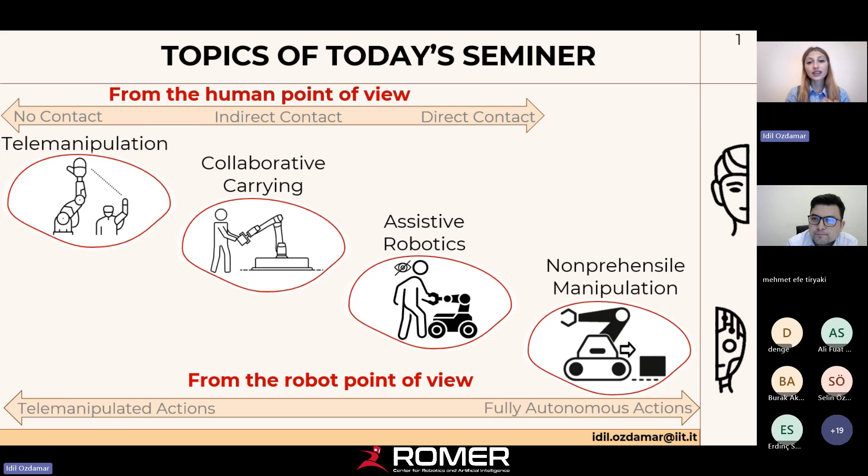In my research, I had the opportunity to work with various kinds of robots to establish effective, safe, and contact-rich interaction, not only between humans and robots, but also between robots and their environments. From the human point of view, these interactions can range from no physical contact to direct contact. From the robot point of view, they involve different levels of autonomy, extending from telemanipulated actions to fully autonomous ones. Therefore, I divided my talk into 4 main categories: telemanipulation, collaborative carrying, assistive robotics, and non-prehensile manipulation.

So let's start with our first subcategory, telemanipulation. The essence of telemanipulation is captivating, owing to integrating human cognitive skills into the system, especially in unknown, hazardous, or dynamic environments. Nowadays, the technological advancements in collaborative robot technology and motion capture systems reduce the classical limitations of effective teleoperation and renew the interest.

Recently, bimanual manipulation has become very popular. Here, the dual-arm manipulators are coordinated to achieve a mutual goal. But with the increase of task complexity, the simultaneous use and coordination of multiple robotic arms is necessary. To this end, a shared control concept has been introduced. It empowers the robot to operate with a degree of autonomy, hence reduces the user cognitive load.

However, very few studies focus on employing more than 2 robots. For instance, a multi-robot data collection platform was developed for gathering demonstrations to coordinate the arms, but only validated in simulation. Another work aimed to increase robots' manipulability index, while the object was assumed to be already grasped. In realistic applications, it is better to cover situations like approaching, grasping, and releasing.

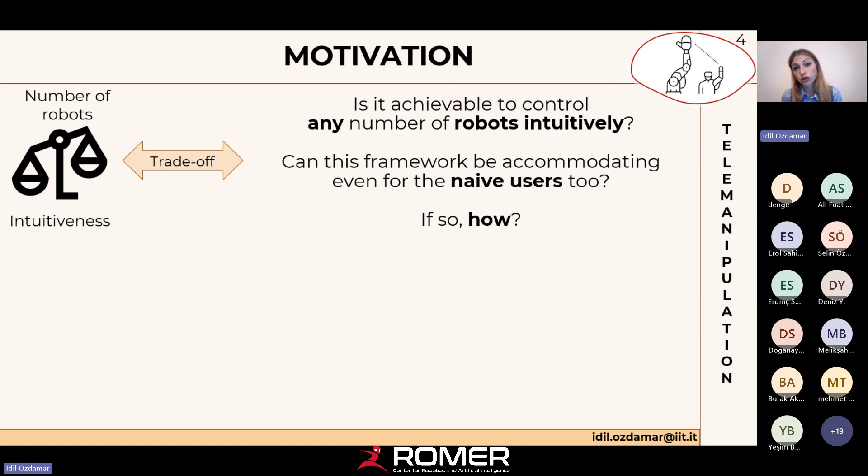To sum up, the questions we seek to answer are: is it achievable to control any number of robots intuitively? Can it be accommodating even for naive users too? And if so, how? In response to that, we propose a novel telemanipulation framework that enables both the individual and combined control of any number of robotic arms.

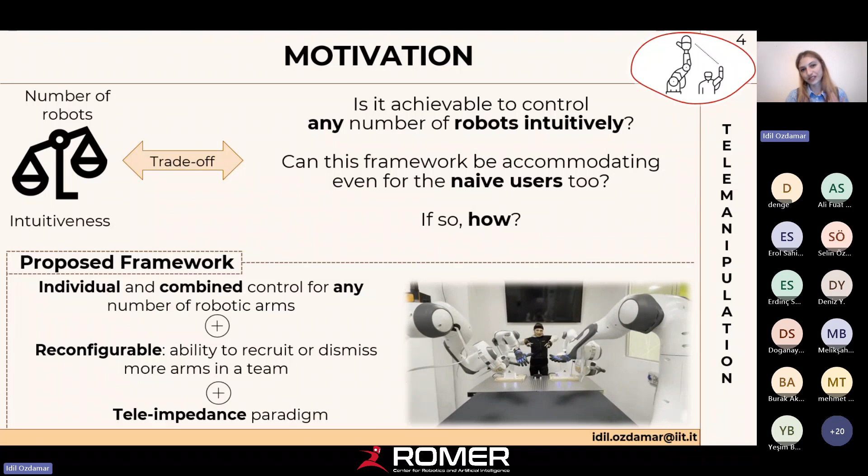In the different phases of our reconfigurable system, each robot could act as an independent arm or one of a pair of cooperating arms. Moreover, the teleimpedance paradigm integrated into the framework addresses performing complex tasks with better safety, adaptability, and efficiency. The framework has three control modalities, and it enables users to control subgroups of arms with the selected control modality according to the task.

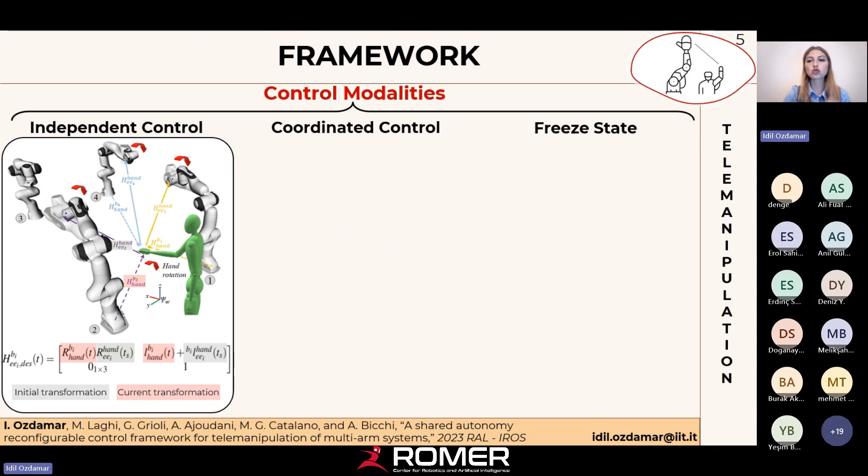The goal of the independent control strategy here is to mimic human hand motion with the selected robot. When the control starts, the initial relative transformations between hand and robot end effectors are collected to map the hand pose and the robot, given in the gray boxes here in the equations. After that, the continuous hand rotation and translation, highlighted in red here, are used to obtain robot desired poses. This video shows how a robot group moves with the independent control strategy.

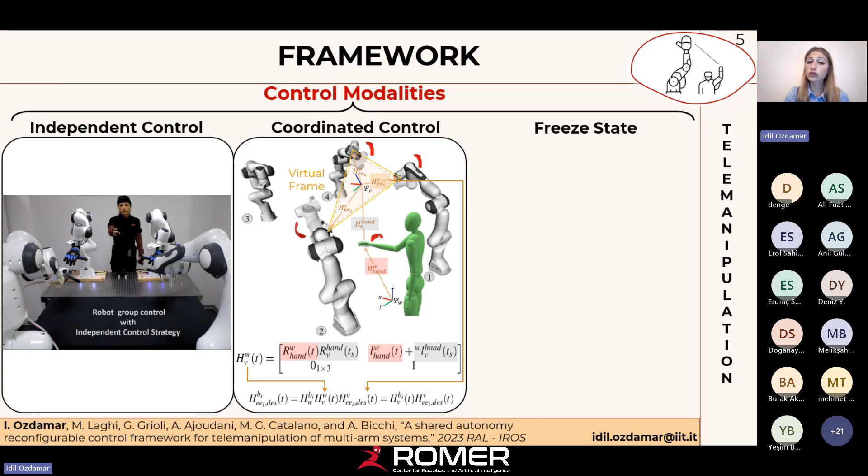When the coordinated control is initialized, the robots are linked to a virtual frame created at the midpoint of the robots. And the hand is also linked to this virtual frame by using the initial transformation again. The motion of the virtual frame is controlled by the human continuously. Moreover, the user can regulate the distance between the robots with the joystick. Here in the video, you can see how a robot group moves if this strategy is selected.

For both control strategies, robot stiffness is regulated by mimicking the stiffness profile of the user's arm muscles. I will explain how we did it.

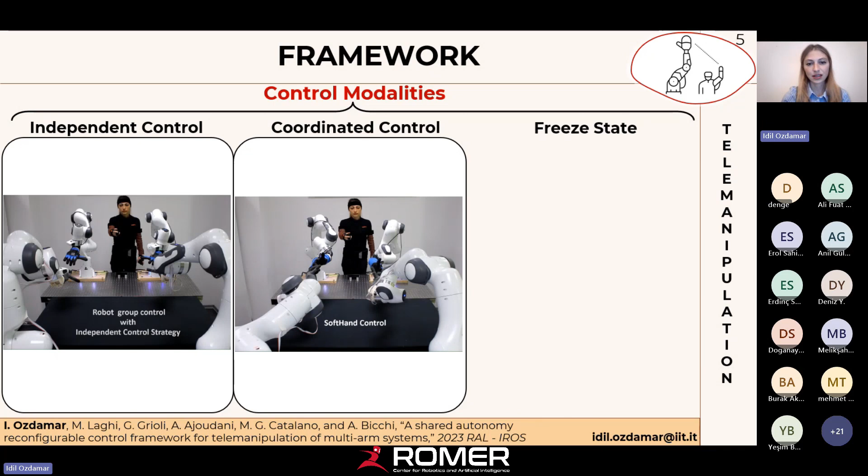When dealing with multiple manipulators, one can benefit from keeping the robot at a definite position. If the user enters freeze state, the robot's poses and stiffness remain constant. The robot group and the last used control strategy are preserved. With this, when the system is unfrozen, the user can continue from where they left off. Here you can see the user enters a freeze state.

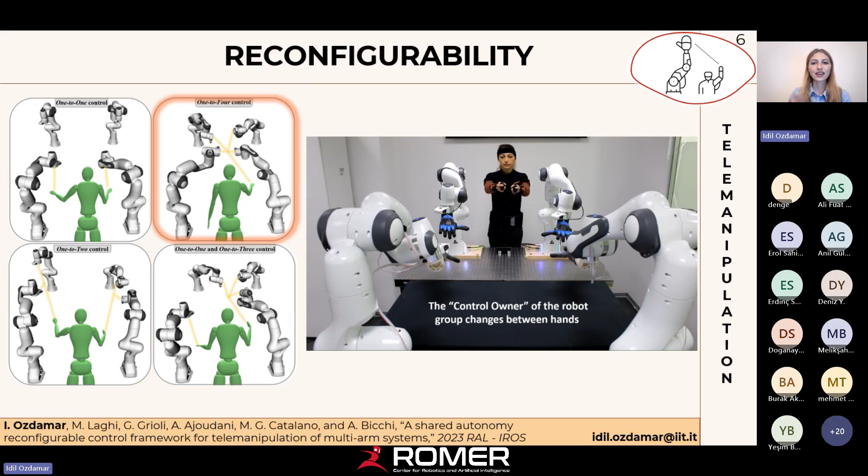I would like to elaborate more on the reconfigurability of our system. This video shows how a robot group with 4 arms can be controlled. Moreover, the operator can intuitively switch the hand that is responsible for the motion of the group. Here, the right hand controls the robot group of 2 robots, while the left hand controls the other simultaneously.

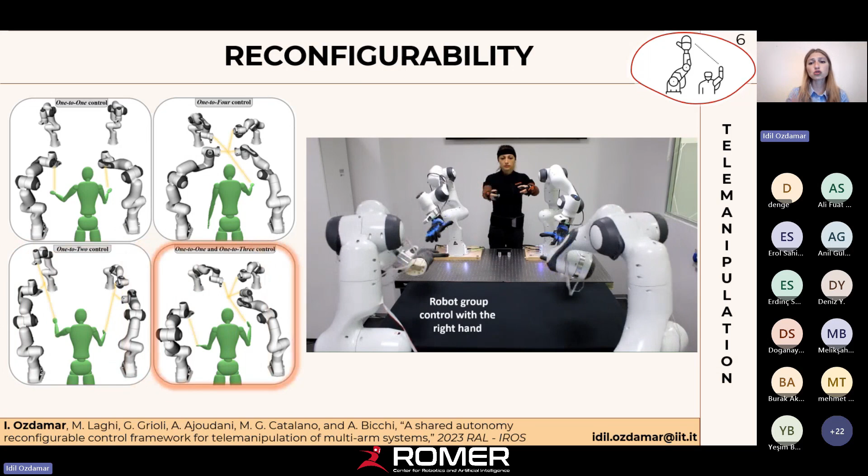On top of this, the robots can be seamlessly combined to form a single robot group. In the last scenario, the user controls a robot group with 3 robots using 1 arm, and 1 robot, then combines again and enters a freeze state.

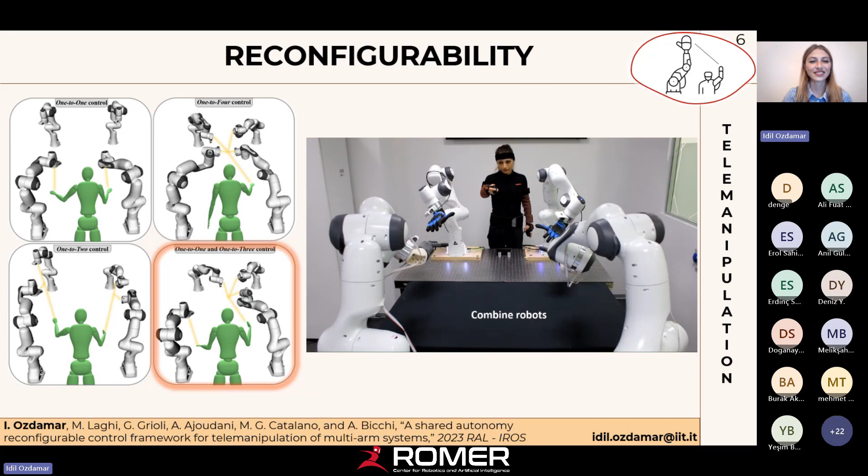Here you can see the experimental setup we used for the evaluation of our proposed framework. The Myo armbands, placed at the forearm of the user, are used to regulate the robot's impedance profile, like mimicking our muscle stiffness. Also, a graphical user interface was provided to the user in order to monitor their current selections.

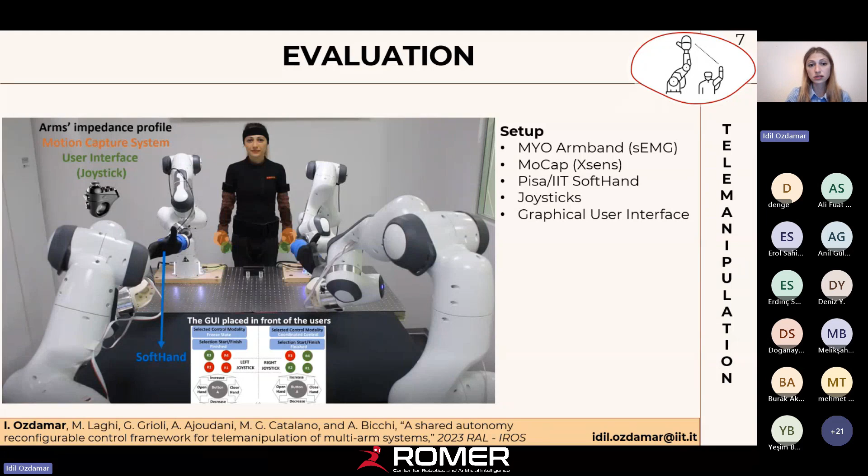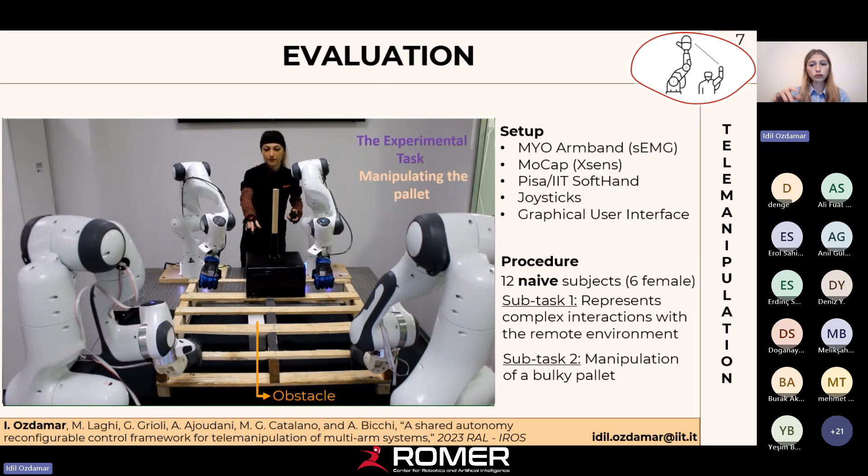The experiments were conducted with 12 naive volunteers who had not teleoperated the collaborative robot arm before. The first subtask includes placing a box and performing a peg-in-hole task, representing complex interaction with the environment. In the second subtask, the pallet must be held from suitable locations, then lifted and translated, and put back while avoiding the obstacle.

Let's look at the outcomes from this work. During the experiments, participants chose independent control over coordinated control in more dexterous parts, employing a specific robot that can reach the box and the peg on the other side. Consequently, this led us to have a wider workspace area.

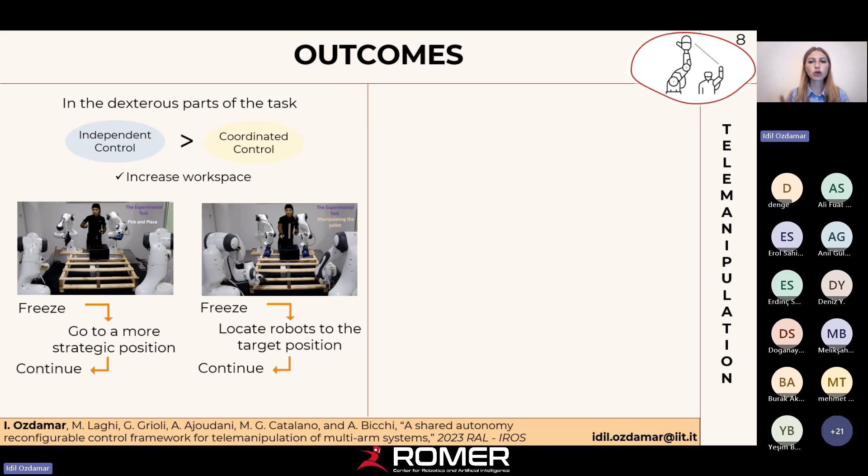We observed that the general tendency was to enter freeze state, position the hand in a more advantageous position, and then continue to do the task. Then robots are brought to the desired points of the bulky pallet and grasp it. For the manipulation of the bulky pallet, mainly a coordinated control strategy was selected. Here users can focus on the motion of the object, the pallet, instead of individual positions of the robot.

Lastly, the participants filled out a system usability scale questionnaire. This questionnaire is commonly used to evaluate performance of the system in terms of effectiveness, efficiency, and overall ease of use. The average percentage ranking that we got was 81.

It allows us to label our framework between good and excellent in this scale. This label by definition implies that the system is well integrated, not complex, and a short familiarization period is enough to adapt from the user side. This is also supported by the decrease in the completion time of the users in the second repetition.

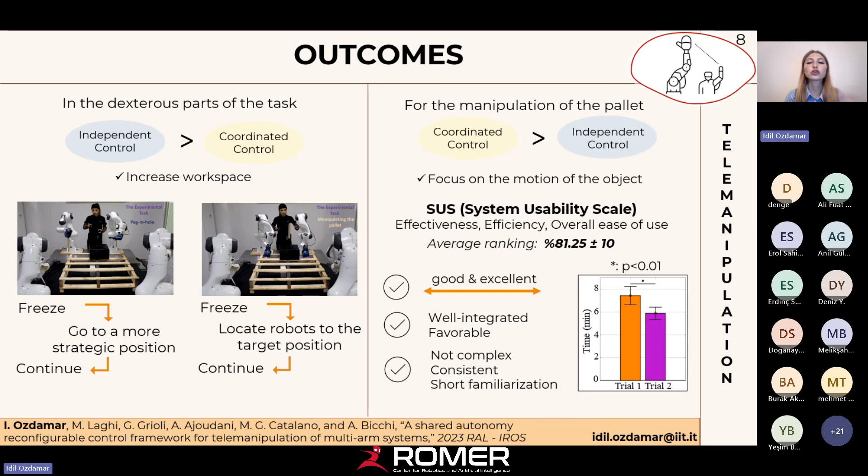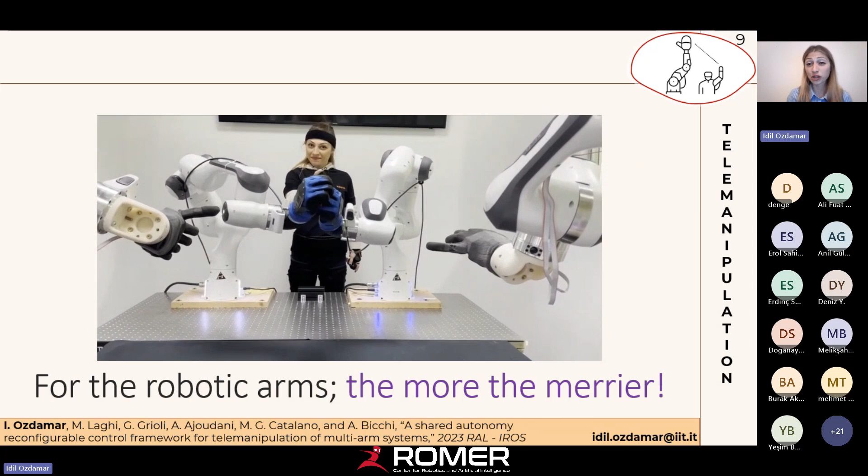I want to summarize the overall framework again. We have developed a novel multi-arm manipulation framework that provides intuitive control of both individual and various combinations of any number of robotic arms.

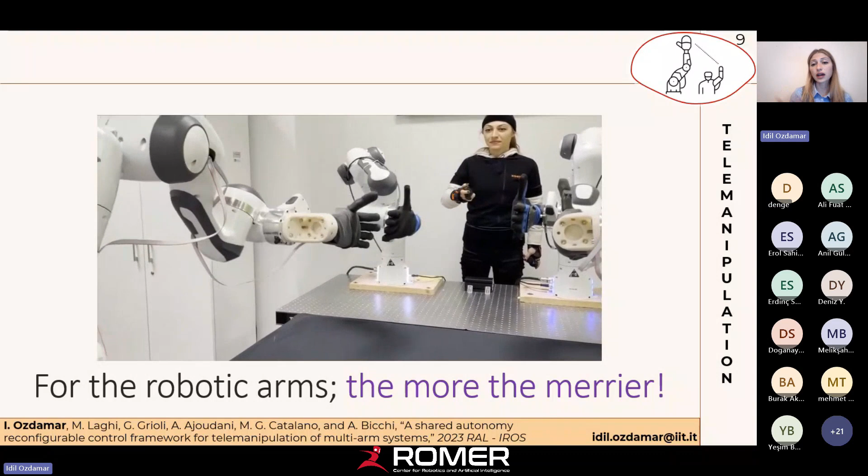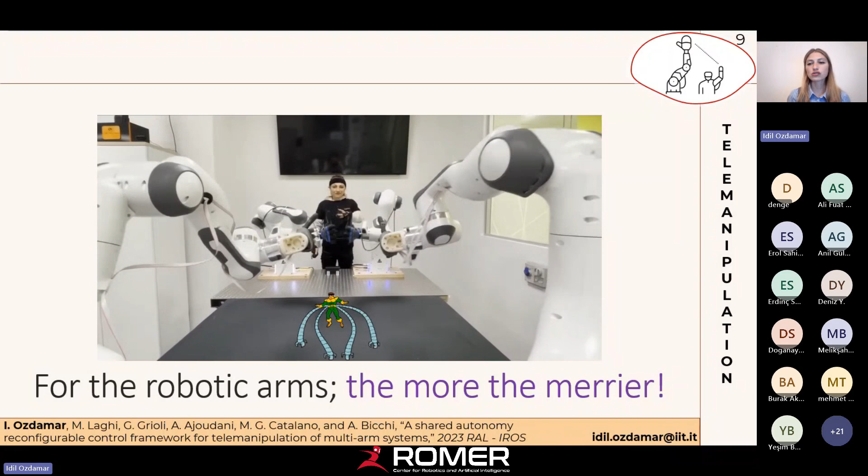Moreover, we demonstrated the advantage of having different control modalities in multi-robot control. Besides, the employed teleimpedance paradigm, which was a constructive complement of our system, may ease complex interaction with the remote environment.

Now, another research area that attracts a lot of attention is collaborative carrying. It centers on the dynamic synchronization of human-robot dyads and offers promising solutions for minimizing user discomfort, especially in industrial environments.

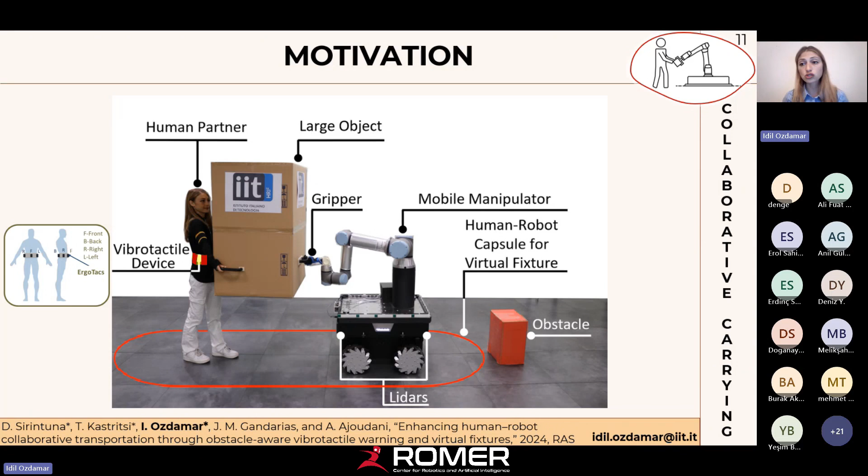Building on this motivation, one major challenge in collaborative carrying arises when a large object obstructs the operator's view of the surroundings. During transportation, such occlusions can weaken the human leader's decision-making capability, which consequently increases the risk of collision.

To address this issue, our study proposed a situational awareness framework for collaborative transportation tasks. It is composed of three main components: the end effector dynamics, the obstacle feedback module, and the whole body controller.

The end effector dynamics calculates a reference velocity, following a standard admittance control law based on the force transmitted through the object in between. The obstacle feedback module aims to augment the human partner's sensations and yields awareness of the obstacles around.

This augmentation is realized through the proposed vibrotactile warning and virtual fixture unit. The vibrotactile warning unit starts to generate warning vibrations via ErgoTacs, placed on the belt of the human, to convey information about the location and proximity of obstacles before the human-robot dyad gets dangerously close to any of the obstacles around.

On the other hand, the virtual fixture unit restricts the team's movement in the direction of the potential collision, only that direction. Particularly, it activates only when the distance to the obstacle is critically close, like we are really close to hitting them. Lastly, the whole body controller generates the required joint velocities of the robotic platform using the desired velocity obtained from the obstacle feedback module.

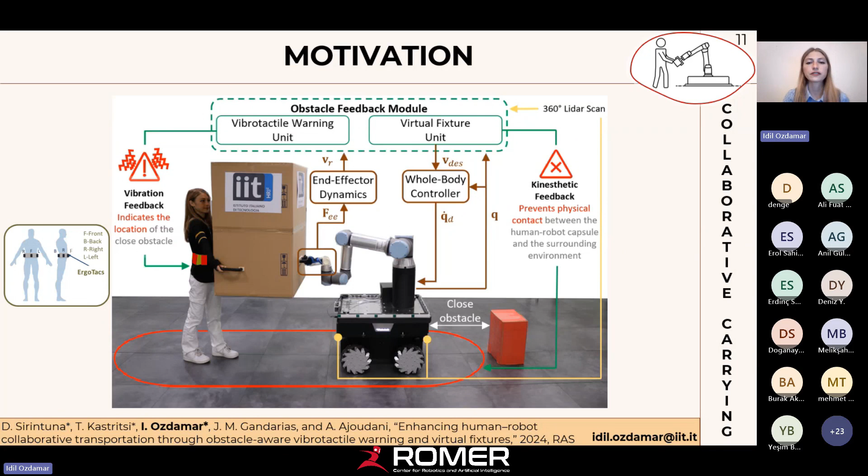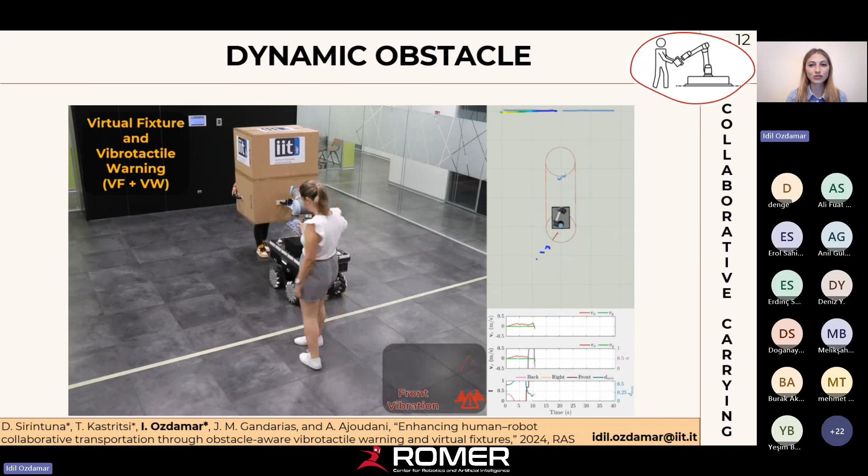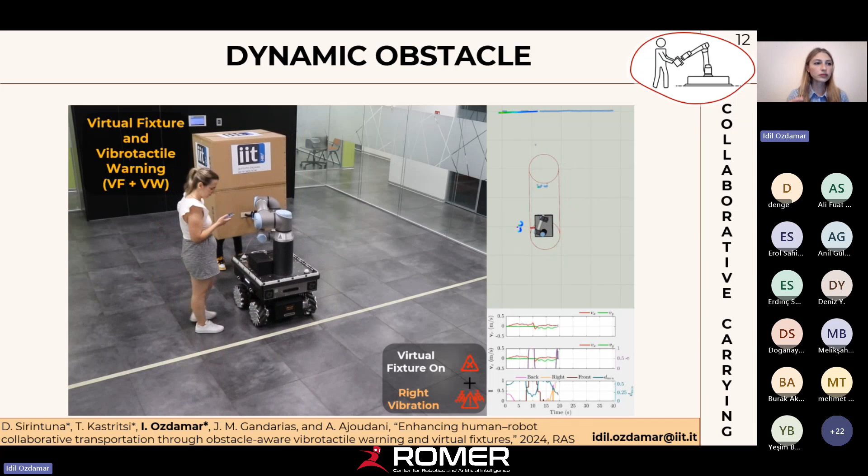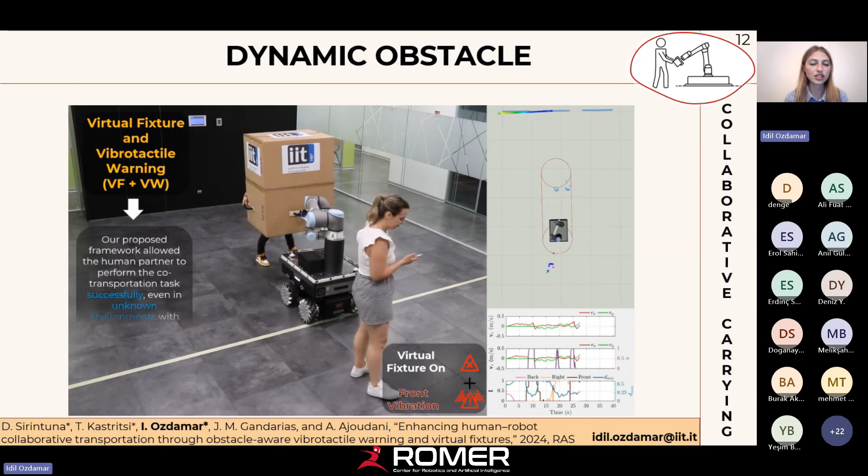Before sharing the controlled experiments that we did, I wanted to first give a short demonstration that captures the overall idea, with the dynamic obstacle case being one of the most challenging scenarios. As you can see, when she entered the workspace, the robot immediately perceived the change and started to create a vibration. Here the vibration is activated, and the virtual fixture also restricts movement in that direction, not allowing it to hit anything around.

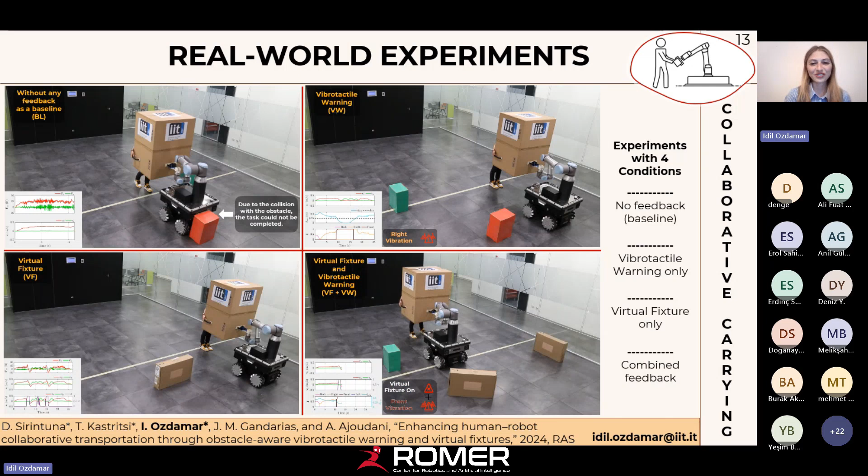After that, this time we only utilize the virtual fixture, which gives the user a sense of resistance, like kinesthetic feedback. Once this virtual fixture is on, the user should go another direction and try again and again. Lastly, we combine both feedback types - there's an early warning with the vibrations, but if you want to keep going to that dangerous place, the virtual fixture just restricts the motion.

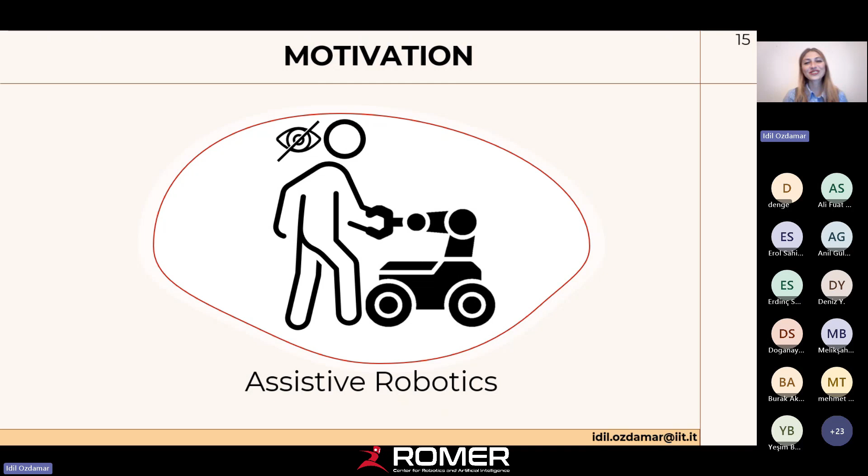Worldwide, there are more than 300 million people that suffer some kind of blindness or visual impairment. The use of guide dogs and white canes is widespread, but they come with important limitations. For instance, guide dogs need constant care, are expensive to train, and cannot make complex decisions beyond their training. This is one of the rare cases where using a robot would be literally cheaper, on top of other advantages, because training a guide dog is also money consuming, and the number of guide dogs is limited, so people wait years sometimes to get one.

White canes, on the other hand, are really primitive. It's just a stick, and they are limited to the detection range, which they can only touch with it. The development of assistive robotic systems to guide visually impaired people has big potential to overcome these limitations.

Let's look at what has been done so far in this field. Different versions of assistance have been proposed. For instance, white canes are enriched by sensors and user feedback. Also, physical assistance for keeping the user in balance is provided by robotic canes. Legged robots are employed using a leash to guide blind people, or alternatively, drones are physically connected by a cable with the blind users.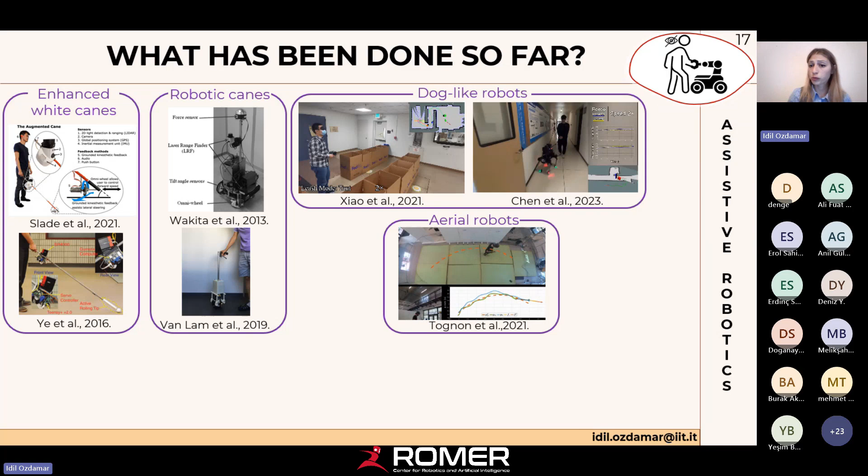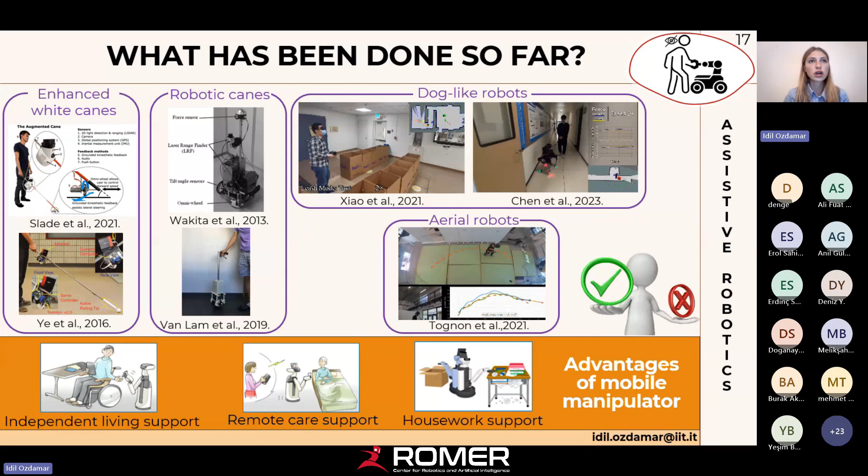However, the presented approaches share a considerable limitation: they are really task-oriented and cannot be exploited for other purposes in their idle times. On the other hand, a mobile manipulator can also be easily employed in other daily living activities. It can lead to increased independence. They can be used as a support for remote care, or it can also function autonomously to carry out other kinds of housework activities.

To benefit from those advantages, we propose a novel framework that enables a mobile manipulator to plan and execute collision-free trajectories, exploiting local manipulation skills to guide a visually impaired person through unknown environments.

In this video, you can see that a robot localizes itself within a global map and continuously updates a collision-free trajectory, given in green color, and guides a visually impaired person through narrow corridors.

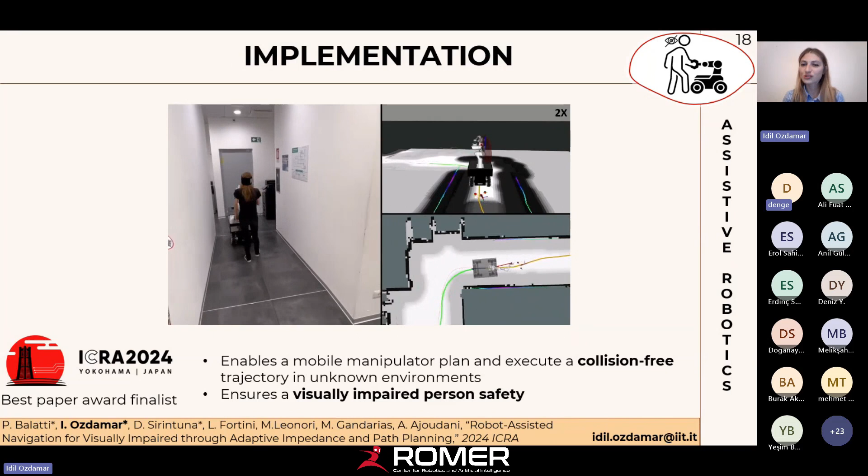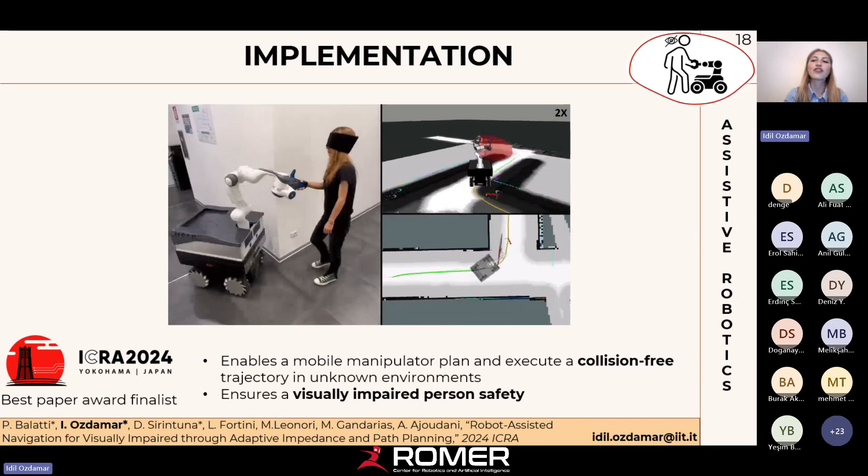Given the multiple safety concerns involved, it was crucial to design a robust and reliable framework. The human is in direct physical contact this time with the robot, and on top of that, we obscured one of the most essential human senses, the ability to see. Also, I would like to mention that this work was a Best Paper Award finalist at ICRA 2024 in Japan.

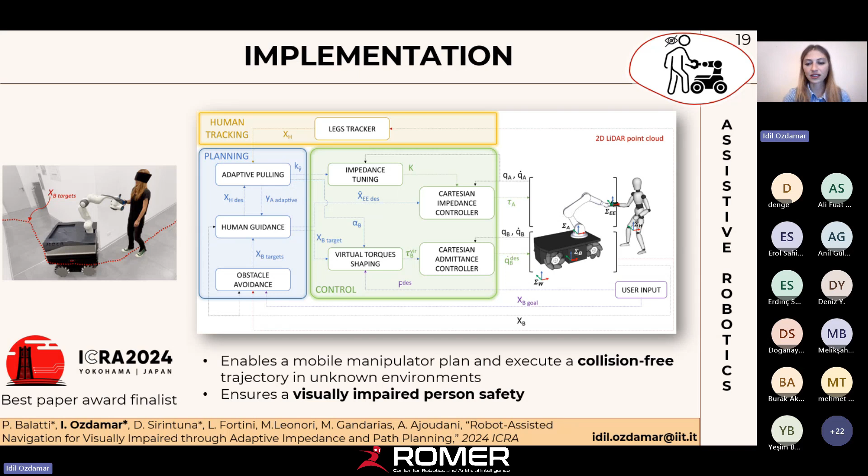On the right side, we can see the software architecture behind the framework, divided into three main categories: planning in blue, control in green, and human tracking in orange. I will go into the details of each one in upcoming slides. This is the high level side.

To generate a collision-free path, we employed an obstacle avoidance navigation stack using both global and local planners. The goal of the adaptive pulling unit within the planning is to prioritize the safety of the human. It keeps the human within the robot's collision-free trajectory.

This module generates a pulling vector between the desired human pose and the current one. You can see it in the right picture with the red P vector. We are tracking the human legs. This is the current human position, and the desired one is the collision-free trajectory.

The x component of this pulling vector is employed to calculate the gain alpha b, that is responsible for regulating the speed of the base. As a result, if the human lags behind, the robot correspondingly reduces its velocity to maintain a comfortable walking pace.

The y component of this vector is used for the lateral readjustment of the end effector pose. With this, we were able to keep the human within the safe collision-free region. Also, the y component of this vector is used for the computation of the lateral stiffness. We formulated the stiffness profile with a logistic function to ensure a lighter pull if the human deviation is low, but a stronger pull if the deviations are increased.

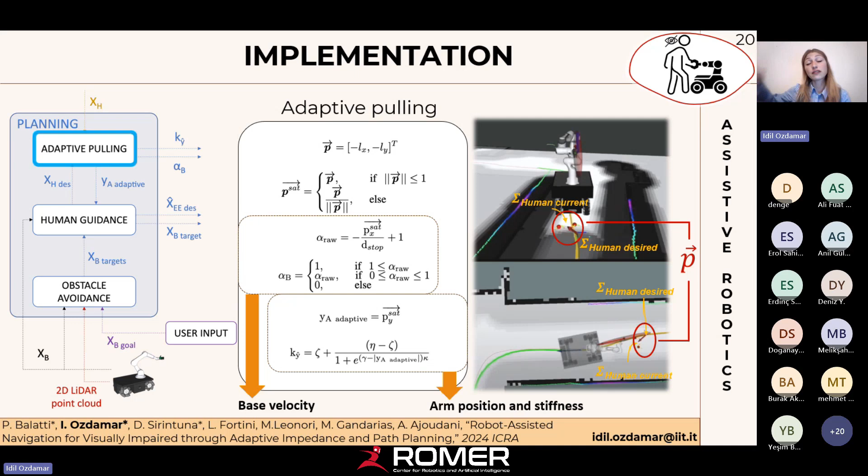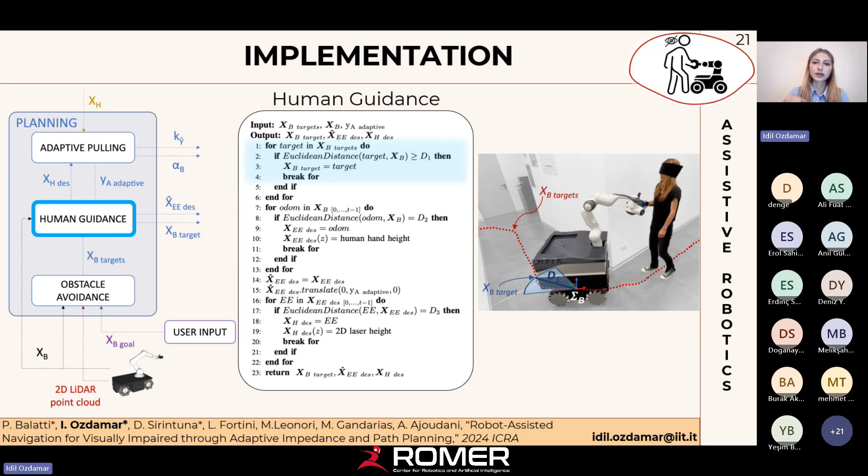The aim of the human guidance unit is to plan a trajectory that avoids collisions at the same time for the mobile base, the robotic arm, and the user coupled with the system. To do so, 3 desired poses need to be computed. The mobile base target waypoint is selected among the collision-free poses produced by the obstacle avoidance unit. So the next base target pose is one of the waypoints D1 distance away.

Likewise, the end effector desired pose is selected among the set of previously passed base poses. So since there is no collision there, it's free to choose, and we pick the one which is D2 distance away from the base. In a similar manner, the human desired pose is chosen as the previously desired end effector pose that lies at D3 distance away. And with this logic, we ensure all desired poses in the system lie within the collision-free area.

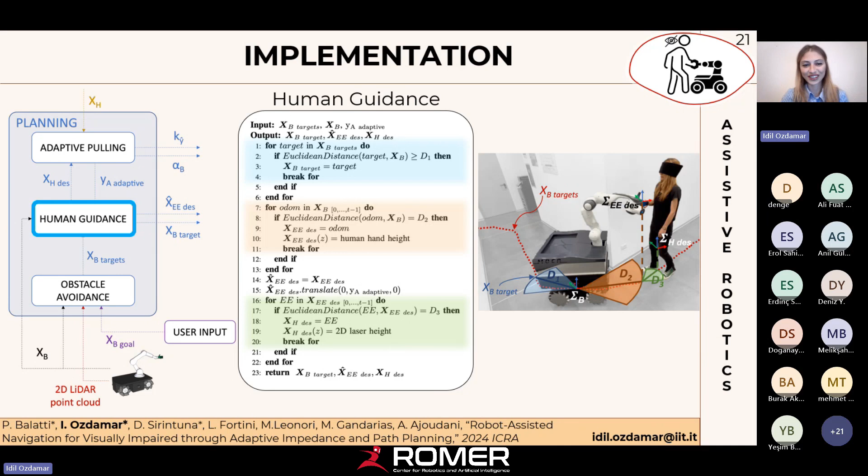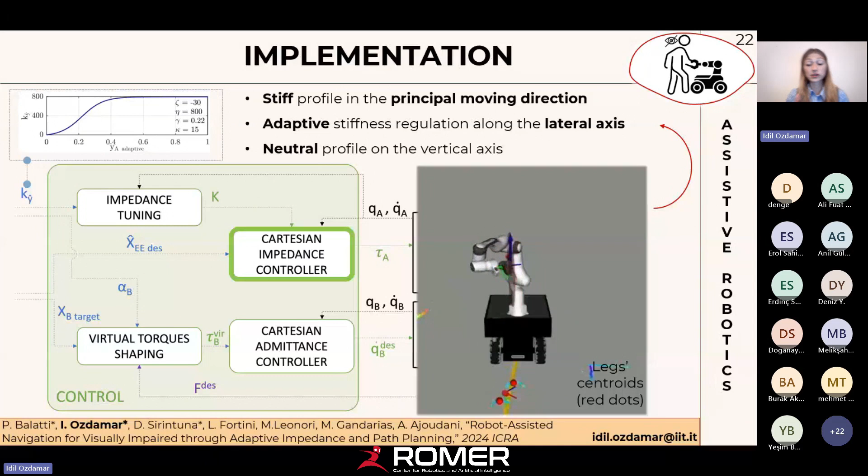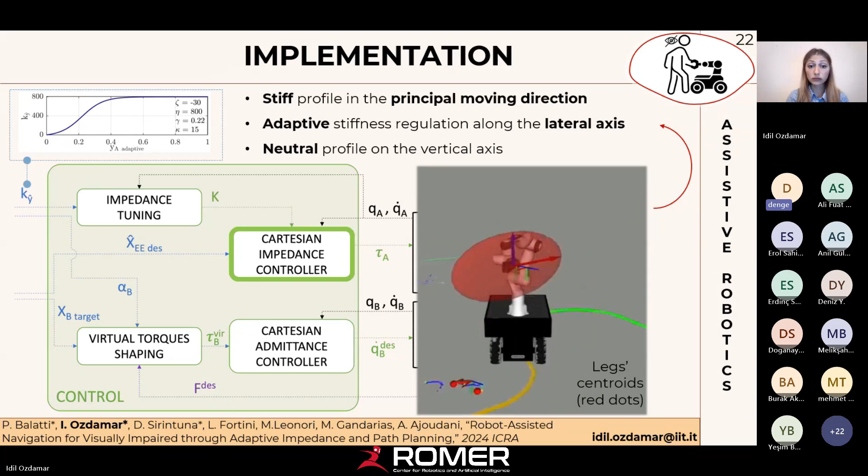With axis-independent stiffness regulation, we have achieved multiple goals at the same time. First, we kept a stiff profile in the moving direction, the principal axis of the movement. It guaranteed a strong pull toward the final location. Second, we gave motion freedom along the lateral axis when the human pose is close to the desired one. Simultaneously, we made the robot stiffer when it is required to redirect the human on the right track. You can see the adaptive stiffness profile on top. As the human deviates more, the stiffness increases.

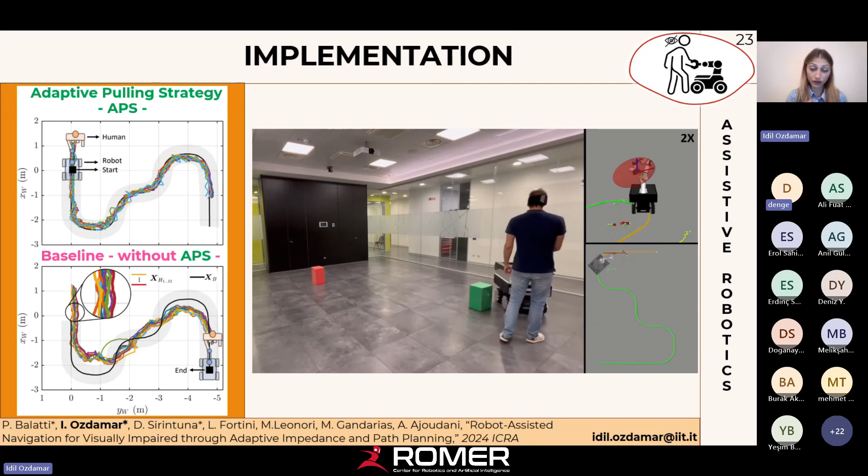So let's start the experiments that we conducted. We first carried out experiments following a predefined trajectory. In this video, we can see the user collides with the obstacles first. When the adaptive pulling strategy is on, there is no collision. In the plots, we can see the trajectories of 12 subjects represented with colored lines, with the adaptive pulling strategy in the top figure and the baseline at the bottom. The black line represents the base pose of the mobile robot.

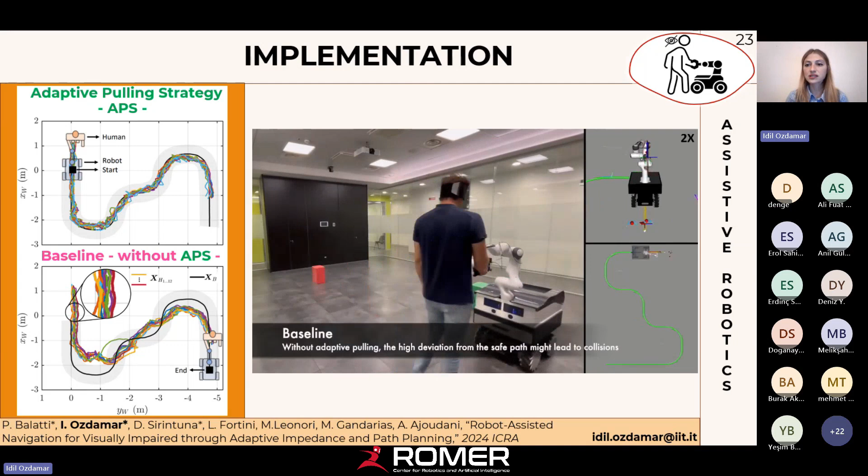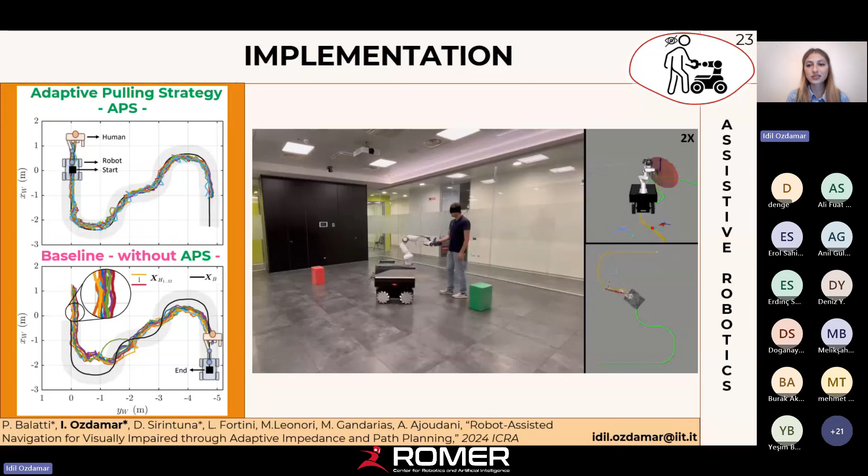By employing the adaptive pulling method, the human pose never extends beyond the robot's base footprint, indicated with the gray area. The lateral unintended deviations are compensated by the framework and all components of the human-robot collaborative system. On the other hand, in the baseline plot, the human pose goes beyond it about 25% of the time, leading to high potential collision risks. And we are never shy to test our framework in more challenging scenarios. Here is one of them.

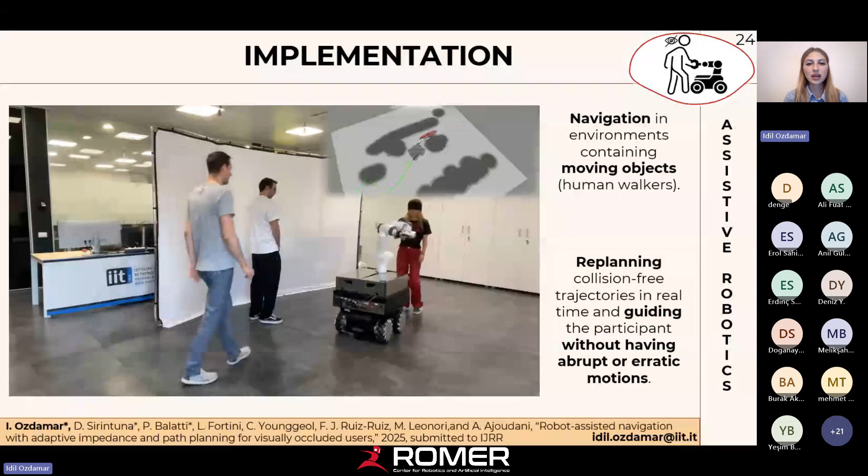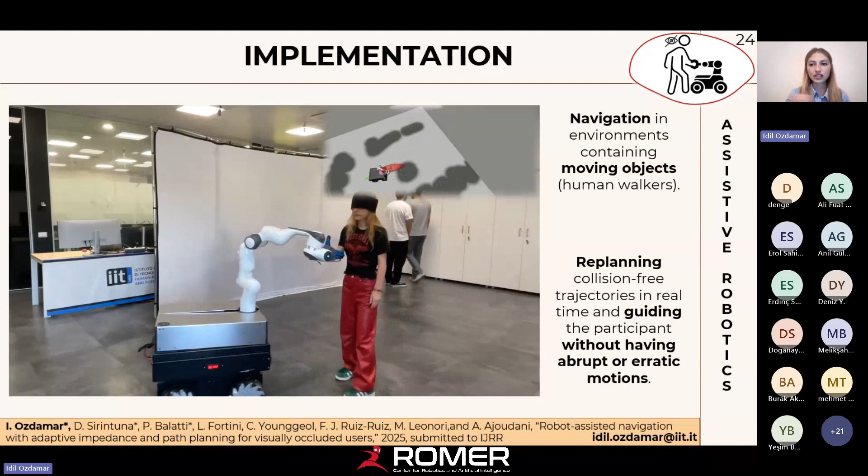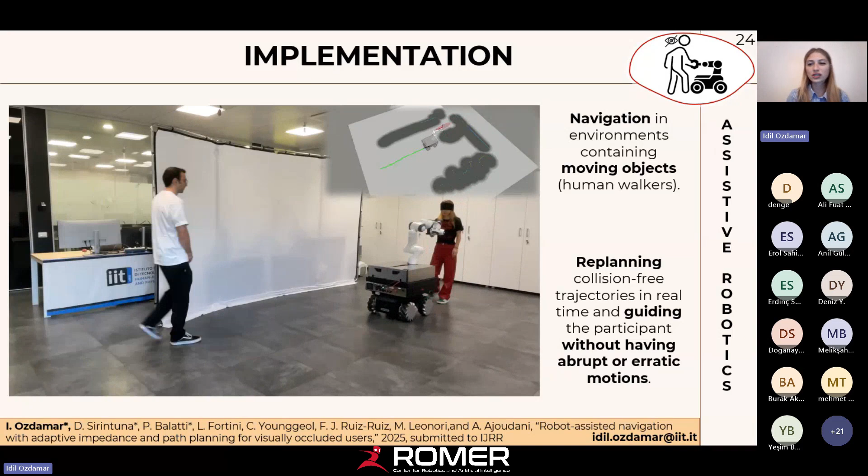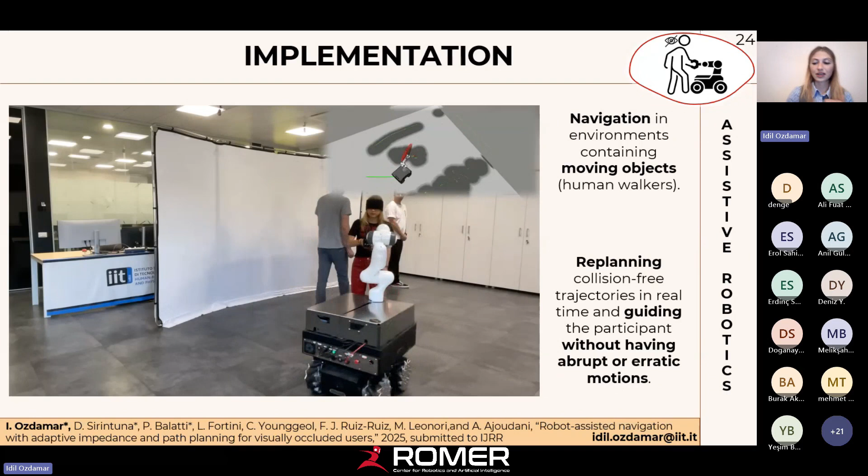It's an example of navigation in environments containing moving objects like human walkers, and you can see the replanning of collision-free trajectories in real time as the green line on top of the video here. And we were able to guide the blindfolded participant without abrupt or erratic motions, because it's important to test whether we can adapt to this newly planned trajectory both with the base and with the pulling unit at the end effector.

We placed a 3D LiDAR sensor mounted on the back of the robot to detect obstacles on top of the base. The human head is tracked in real time to estimate future collision risks based on the closest obstacle above. And if an obstacle lower than the human standing height is detected, a vertical path is planned first. Then the end effector height is continuously adjusted based on the detected head position and the current closest obstacle height data. In addition, the system dynamically regulates the vertical stiffness as well, following the same logic as the horizontal pulling unit that I explained before.

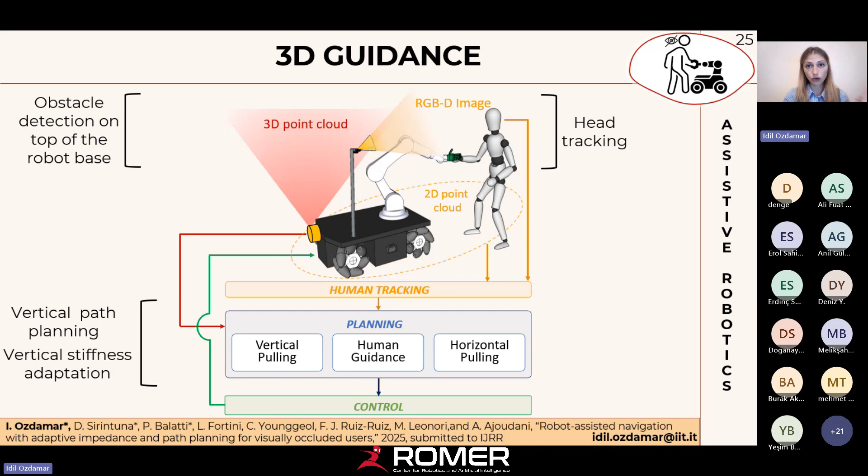And when the human head position is not sufficiently low, indicating a need for more downward guidance, the vertical stiffness increases, causing the robot arm to pull down more. Altogether, these mechanisms enable smooth 3D adaptive guidance and protect the human upper body as well, while maintaining responsive motions for all the environment around.

Yes, so these are some showcases. We have a state machine diagram on the right side. You can see now it's free. Now we detect an obstacle in the region of interest, it's white, and then it pulls down the human, the participant. In obstacle state, we stay down until there is no collision risk at all.

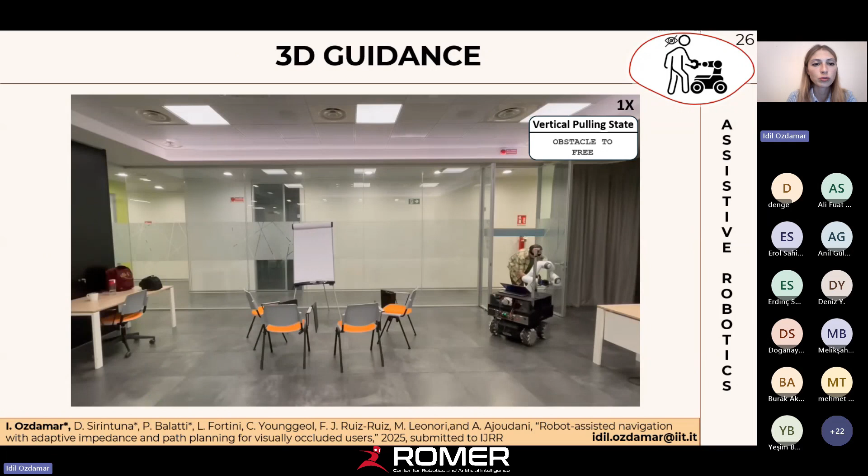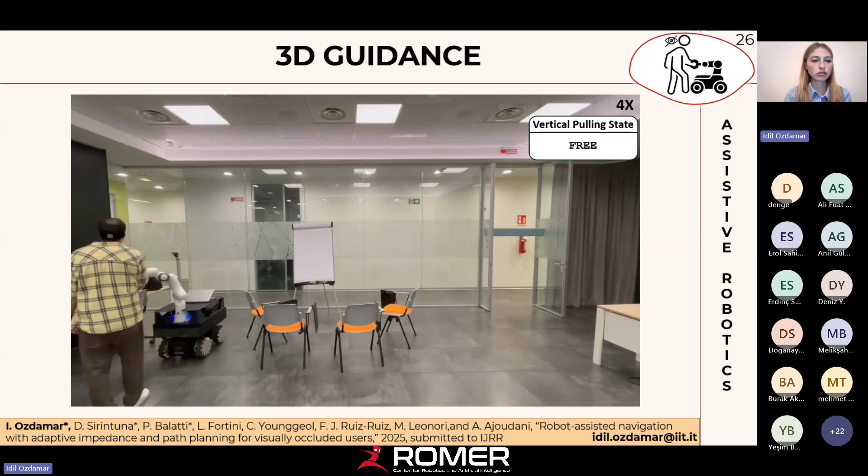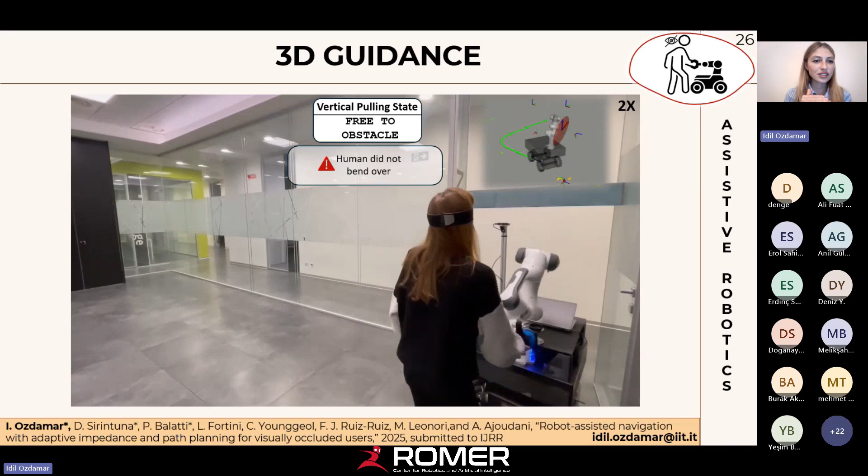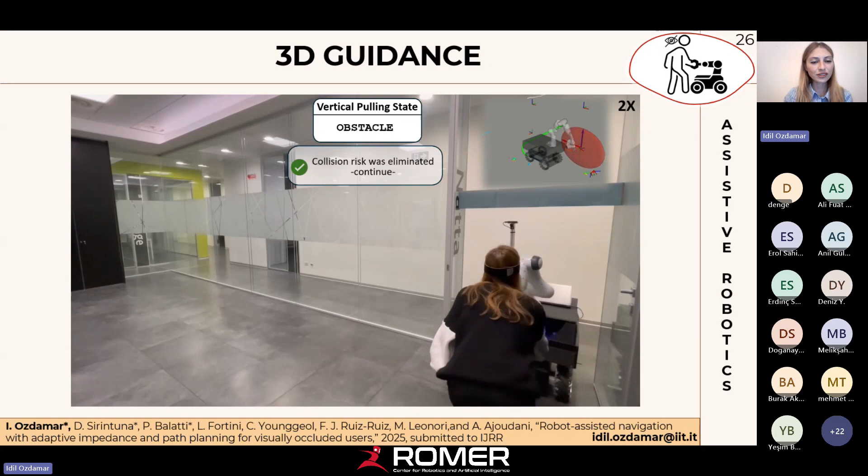So the system ensures the human passed that obstacle and then replans an increasing trajectory, and we still have this horizontal guidance. In the upcoming video, we will see another emergency state. So here, the human did not bend over. So the base is stopped. So we again have a safe constraint and pull down the blindfolded person more. And once the tracked head position is under the obstacle, we continue our motion.

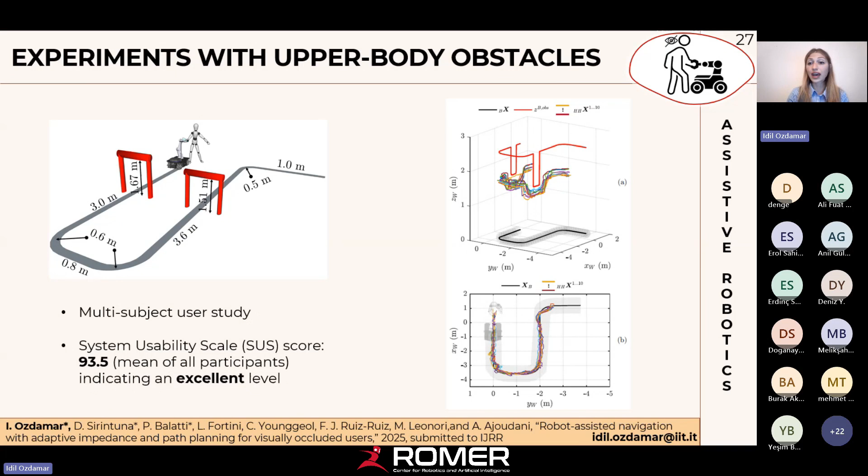We have tested our system in multi-subject experiments with obstacles at varying heights. No collision occurred and all subjects consistently remained within the safe region. Also, the participants filled out a SUS questionnaire, the system usability scale questionnaire, and the score we obtained was 93, quite high, indicating an excellent level.

So, we have reached our final topic. I promise just one last push before we wrap up. And what a coincidence, that's exactly what this topic is all about, pushing. Here, the human is no longer in the loop, and the robot must be capable of autonomously executing the tasks. Today, the focus will be more on non-prehensile manipulation, where the robot moves objects through controlled pushing.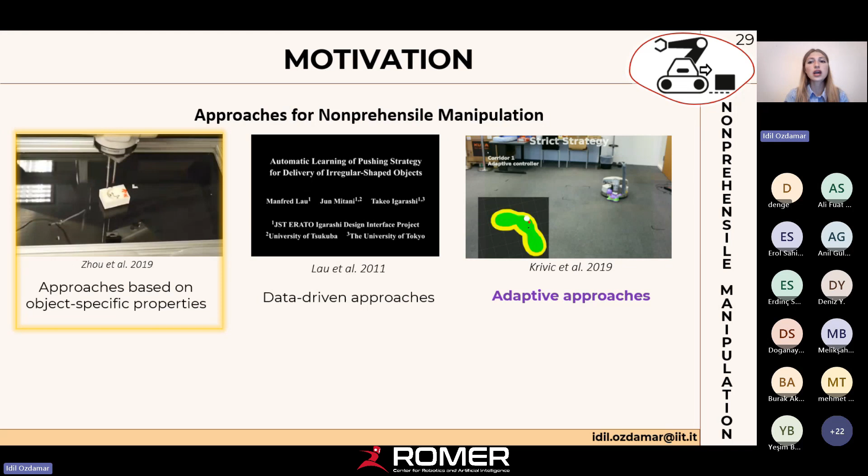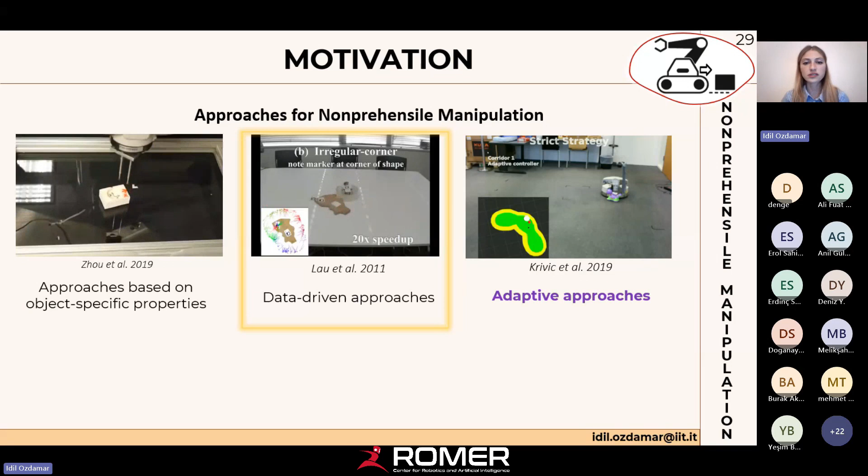Although pushing with legs and arms is an intuitive task for humans, even with objects that have diverse physical characteristics, these skills remain a significant challenge for robots. Some studies have explored pushing strategies that rely on knowing the object-specific properties. They know it, and using that, they transport the object. In contrast, another line of research focuses on learning how objects behave when pushed. The idea is to collect hundreds of samples describing how an object moves under different pushing actions.

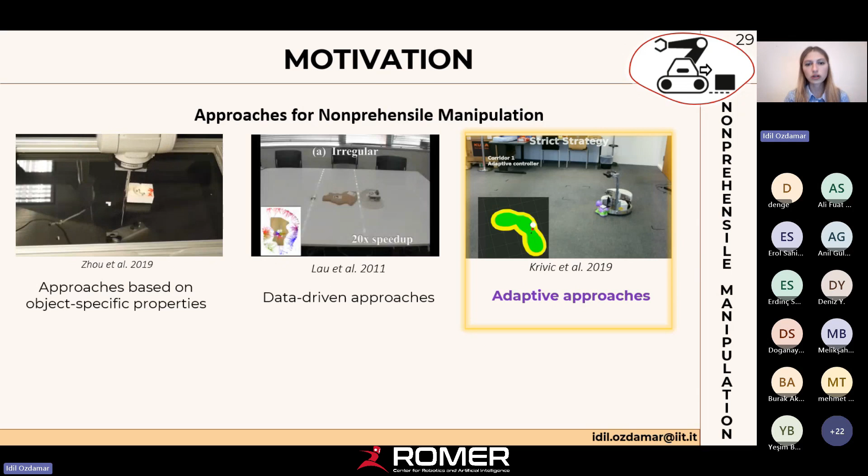And there are a few works that employ adaptive approaches based on modeling unknown object motion behavior on the fly. And I would like to highlight that much of the state of the art depends on prior knowledge, modeled behavior with simplifications that may not always accurately represent the behavior of the objects in real-world pushing scenarios.

So to address these challenges at once, we propose a novel reactive pushing strategy. This strategy allows a mobile robot to dynamically adjust its base movements, meaning its linear and angular velocities, in real time to achieve successful pushing maneuvers. Notably, our strategy adapts the robot motion based on the changes in the contact location obtained through the tactile sensor covering the base, avoiding dependence on object-related assumptions and model behavior. So it's purely reactive. We were inspired a bit by humans: if we close our eyes, we can push the object with the palm of our hand. That was our initial point.

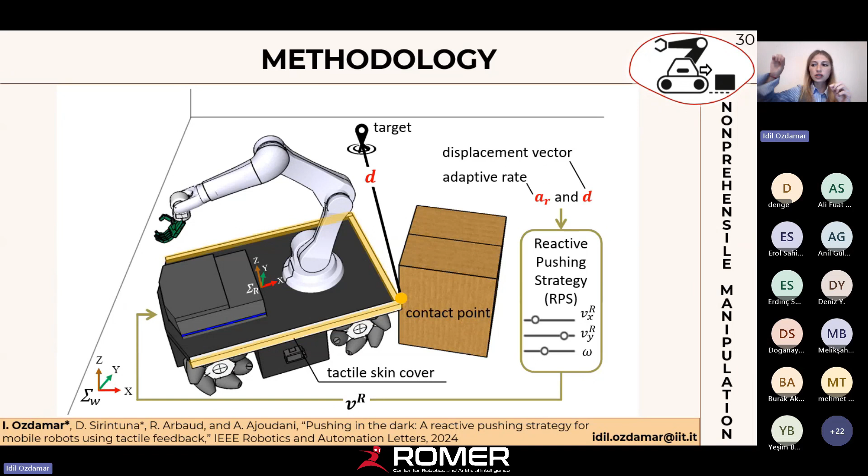The computation of the base velocities relies on two primary inputs in our system. One, the adaptive rate, derived from the location of the contact point, and the second one is the displacement vector connecting the contact point to the target. So we are trying to take the contact point to reach the target. Let's look at the proposed methodology in more detail. We have formalized an adaptive rate, which is computed on the fly based on the lateral distance between the contact location and the robot center, and a v star velocity scaled with respect to the distance to the target.

When the contact point is close to the center, meaning AR close to 0, the robot generates faster forward velocity with minimal lateral repositioning to reach the target. On the contrary, as the contact point approaches the edges of the base, since we don't want to lose the contact, the parameter AR enables higher lateral velocity. This lateral velocity of the base to the sides facilitates a sliding behavior of the object toward the center of the robot base, simultaneously reducing the Vx to prioritize the repositioning behavior more. So this is critical to not lose contact with the object, having this reactive adjustable autonomy between them.

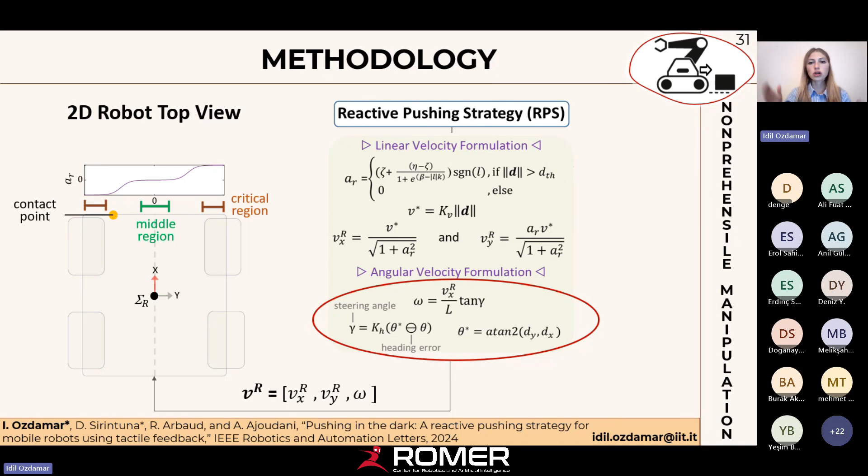And lastly, in our formulation, the angular velocity of the robot reduces the angular heading error. So in other words, the robot gradually but continuously rotates to align its direction with the target. To demonstrate the robustness of the proposed strategy, we first carried out extensive simulations. The experiments involved different target points located in the entire vicinity of the robot, two sets of friction coefficients, and three objects with varying mass and shapes, but the controller doesn't know anything about it.

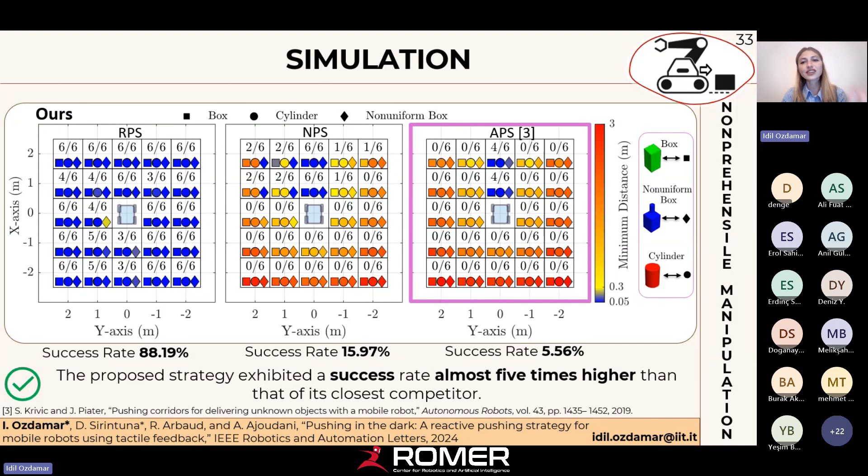So the colored bar depicts the minimum distance achieved between the contact point and the target location. And as you can understand, we want more blue color rather than the red ones. And we additionally compare our reactive pushing strategy with a non-reactive one and a state-of-the-art method akin to ours from the literature, namely adaptive pushing skill. The results show that the proposed strategy exhibited a success rate almost 5 times higher than its closest competitor.

So we deliberately used ungraspable and heavy objects in our real-world experiments. This is like 25 kilogram, 12 kilogram objects, and the previous research typically considered targets only in front of the robot, neglecting the ones behind it. So we also included the targets behind, and we reach all the targets with 5 centimeter accuracy.

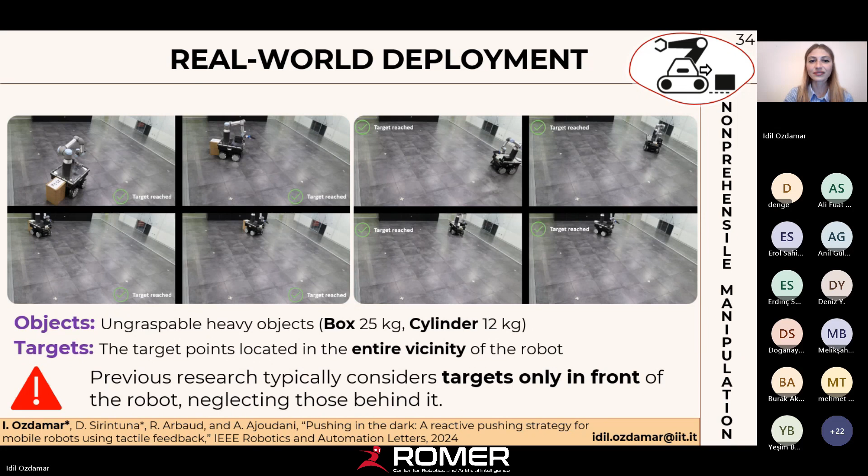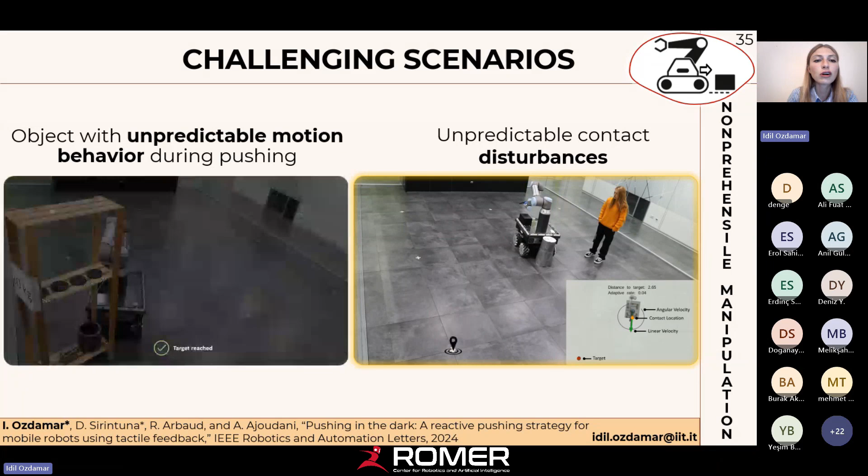Here, more challenging scenarios. As you can see, it's impossible to model that kind of an object. It's heavy, you don't know the friction coefficient, friction distribution at all, and we use that kind of a setting, and also we poke the robot more and create disturbances, but still it is able to reach the target. So in the video, do you also see the RViz visualization?

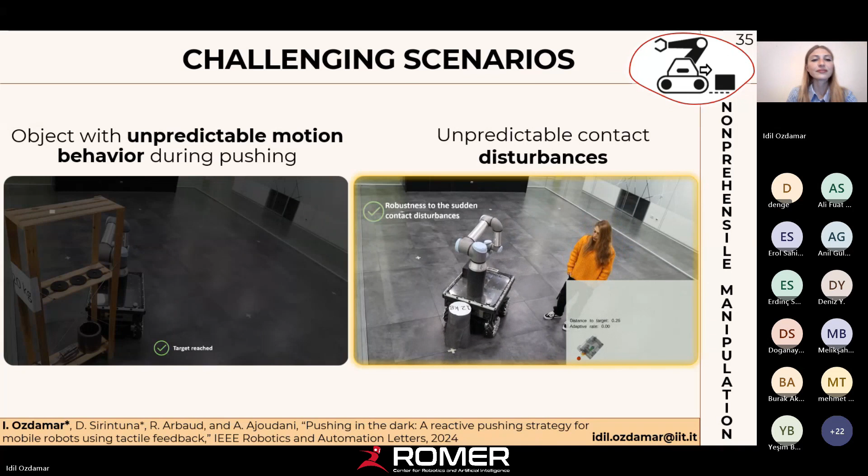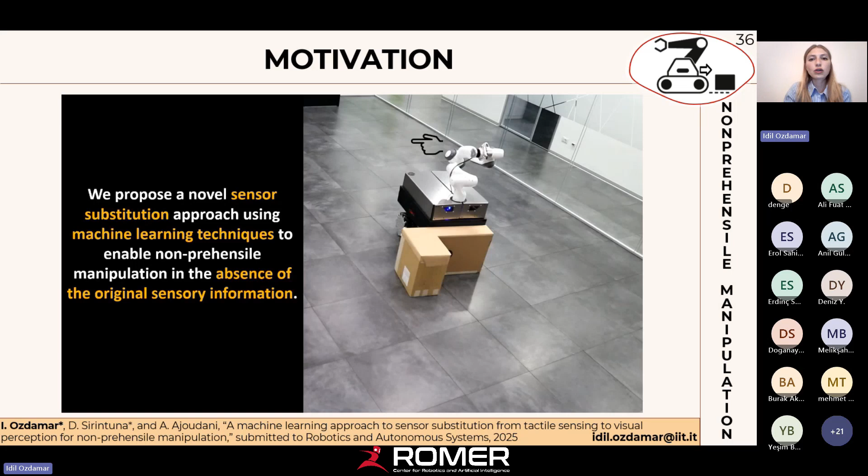And what if the robot is no longer equipped with a tactile sensor? Can we use the same controller with other sensor perception hardware types? So in response to that, we propose a novel sensor substitution approach using machine learning techniques to enable manipulation in the absence of original sensor information, in our case, the tactile sensor, because not all mobile manipulators are equipped with a tactile sensor, and maybe this controller may be used with other sensor types. So we wanted to test that.

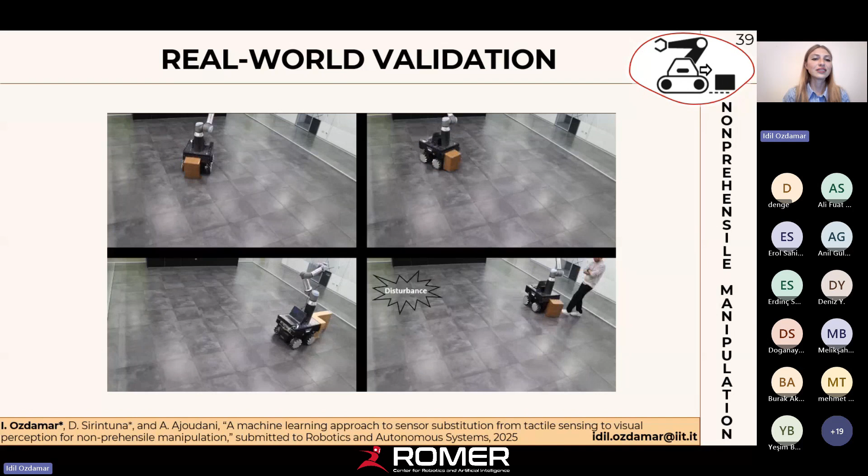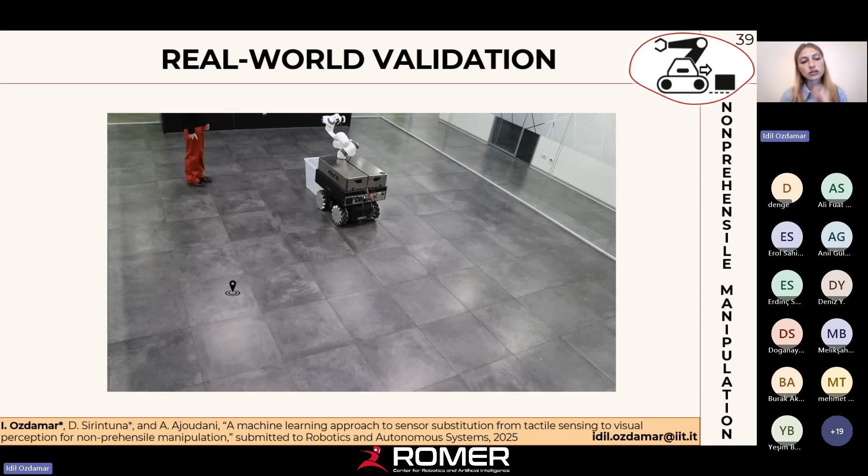Here you can see we are again disturbing the system. And lastly, dynamic center of mass perturbation. So the inertia of the object is always changing. Yet it adapts.